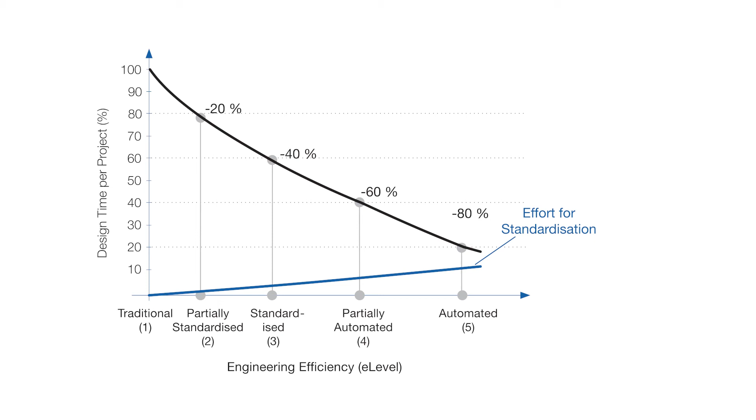In total, there is an overall evaluation. 1 represents manual, analog, sequential, all the way up to 5, which represents digital, automated and integrated levels.

This stands for the degree and depth of utilisation of the CAE application. It's an assessment of the level of training and the knowledge of the potential of the CAE solution and its application. Only those who know which methods exist and use them correctly can increase efficiency.

An example is a CAE software solution having the possibility to take in and read in the sensor actuator lists from a preliminary planning stage. If you're not familiar with this function, you cannot use the continuous data flow. This leads to duplication of work, errors and thus additional work.

The seminar, The Control of the Design Area, shows how key figures can help as a control instrument, what the most important parameters are, and how a suitable key figure system can be implemented on the basis of a practical example. The study shows that just 10% more effort with regards to standardization results in a 50% time saving.

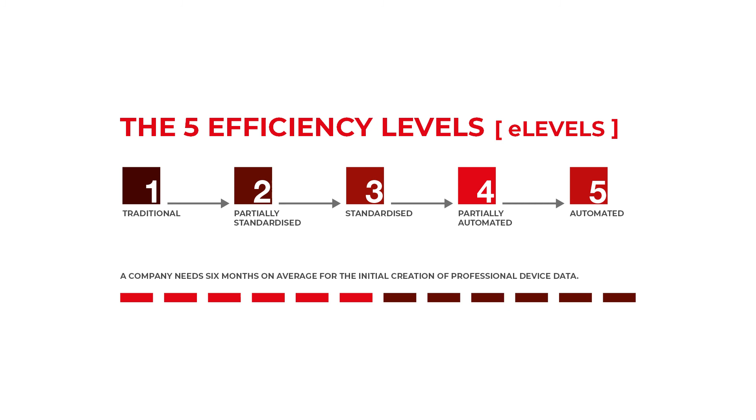This is in the creation of circuit diagrams. It also highlights that you can save an additional 25% of time if you utilize partial automation in this circuit creation. The greatest leverage for all companies lies in standardization, parts data maintenance, and the creation of reusable standard circuits. The companies that proceed with this method have a considerable competitive advantage. All in all, an average increase potential of 20% can be created.

Here, an analogy can be drawn to the changeover in CAE from 2D to 3D. First of all, it is about the structuring, the reuse, the modularization, the platform concept and the configuration.

In my view, many companies know about this and are working on it. Often, however, the topic is not implemented consistently and sustainably due to the initial investment. A lot of measures are necessary. The right software alone is simply not enough. The entire process must be considered.

Younger companies clearly have an advantage here. They start quite differently. For example, they immediately embrace the concept of digitization.